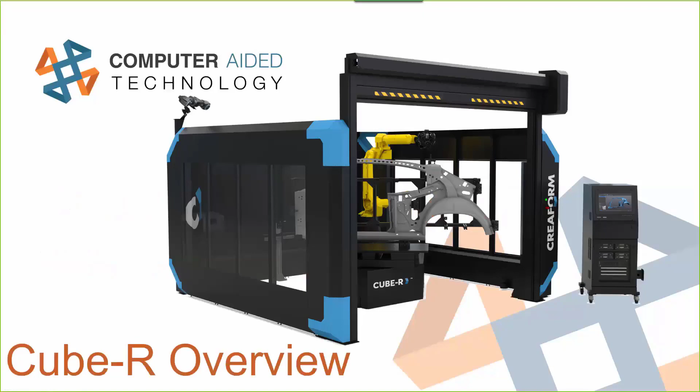Just an overview of the Cube R. The recommended part size, we can do parts up to 3 meters in length - length, width, height - 3 meters, as long as the part fits within that bounding box, the Cube R can safely process that. We have an accuracy of 30 microns or 1.2 thousandths of an inch, and a mesh resolution of 50 microns or 2 thousandths of an inch.

We'll go into a little bit more detail on the differences between accuracy and resolution and what that actually means in terms of real-world application.

The Cube R also has fully integrated safety systems to make sure that the system can't be run in a way that will cause any sort of employee injury while in operation. It also has an automatic calibration, which is really nice to prevent accuracy drift over time, so you can just program that into the robot's running program, and it'll self-calibrate.

The whole system is run off of a Creaform MetraScan system combined with a FANUC M20iA robotic arm and a high-capacity 360-degree turntable.

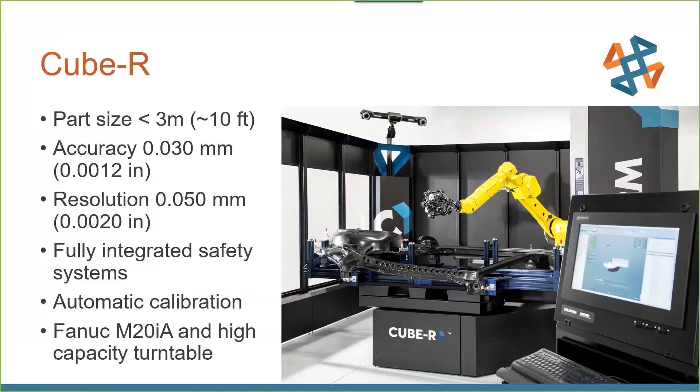Expanding on that robotic arm, it's a 6-axis arm combined with a 360-degree turntable for 7 total axes of motion control. The arm itself has 0.08 millimeters of repeatability, a max reach of about 1.8 meters, kind of ties into our max part size of 3 meters, and a 1,000 kilogram or 2,200 pound capacity automatic turntable.

If we do have parts that large, a really nice feature of the turntable is that it is forklift compatible. You can see the forklift fork slots here on this side, and you also have another set on the longer side as well. It's very nice to have that forklift capability when we're dealing with thousands and thousands of pounds of parts.

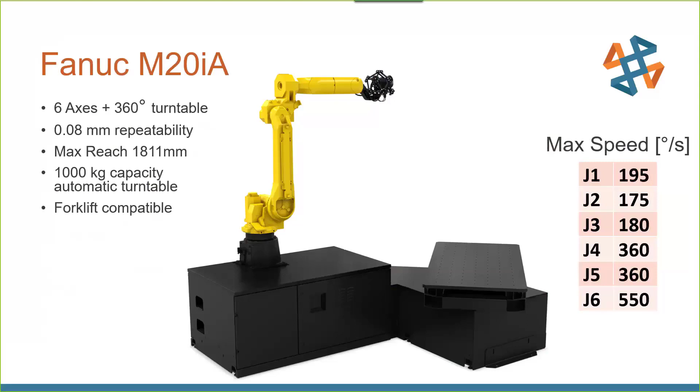What you see on that table on the right there is just, if you're curious, the different max speeds in degrees per second of the joint. So J1 is joint 1, and that is the base of the robotic arm attached to the control cabinet, with joint 6 being the wrist attached to the scanner.

So how does scanning actually work? It's a 2-part system. Like I mentioned, it's a robotic-mounted Creaform MetraScan. The MetraScan operates with 2 main pieces of equipment here.

We have the actual scanner, the laser scanner that's attached to the end of the robotic arm that you can see in the foreground here. It almost kind of looks like a disco ball. Then in the background, in the top corner of the scanning cell, we have the CTrack device - this is the dual cameras that you see at the top left of the screen.

That camera system is going to be watching the cell and using different information gathered from these positioning targets. A little blurry in this photo, but you can see they are the white dots with the black rim that are both on the scanner itself, which is on the end of the robotic arm, as well as in the bottom right of your screen - you can see that those targets are actually attached to our turntable as well.

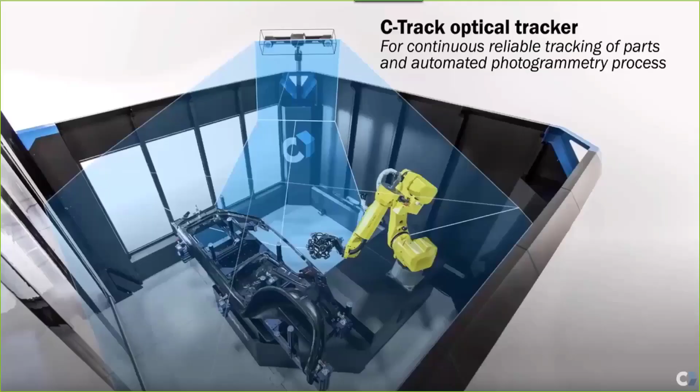And what this allows us to do is the CTrack is tracking these targets both on the part as well as on the robotic arm. It uses that information to create a reference frame.

When we're doing these 3D scans, we always need 2 pieces of information. The first piece, we need a reference frame - we need some way to find our way back home. We need to leave a trail of breadcrumbs, so to speak, so that we can chain all of our pieces of data together in an accurate and efficient manner. If we didn't have a reference frame, we would just kind of be creating floating data in the middle of nowhere with no inspection application, so to speak. So the CTrack is really the key to the solution there in creating the reference frame.

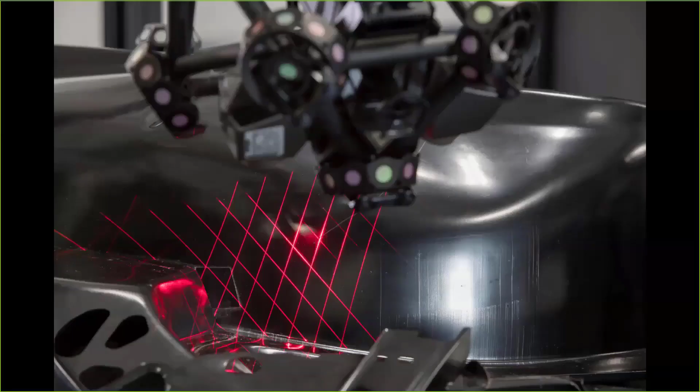Once we have that reference frame established, now the laser scanner comes into play. So the ball with the positioning targets on it, that's the laser scanner, and it will begin to project this crisscross laser array on the part surface. There's a camera system in the laser scanner itself that watches those lasers and observes how they deform across the part surface, which allows it to pick up the 3D surface deviation we're looking for in our measurements. So the scanner picks up the 3D surface information, and the CTrack then uses the reference targets to place that surface data into our global orientation, so we can measure from the far end of the part to the far end of the part accurately.

Getting specific on the actual MetraScan unit, you can see a nice rendered image there. So like I said before, accuracy down to 1.2 thousandths of an inch, resolution at 2 thousandths of an inch.

So what do these actually mean in terms of real-world application? Accuracy is your point-to-surface accuracy. So if you have a cube where the top surface is exactly 5 inches off of your tabletop, and you scan that surface, those points are going to be generated within an acceptable error cloud, in this case 1.2 thousandths of an inch above and below 5 inches, if that makes sense. So accuracy is the point-to-surface accuracy that the scanner can provide.

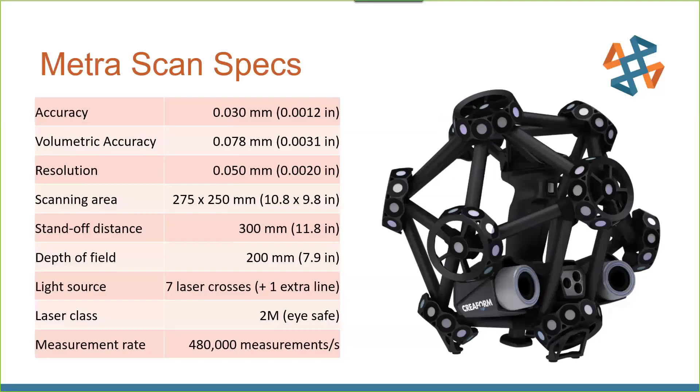Additionally, the system can pick up 480,000 measurements per second. That's really great for inspection applications like this, where normally you'd be probing the surface with a CMM, and the more points you probe, the longer it takes and bogs down the whole inspection process. Here, we're grabbing so many points per second that we're going to get plenty of data needed to make very complex surface deviation inspections easily and quickly.

Those positioning targets are placed on a very stable scale bar. This scale bar is a known value in terms of length and geometry of the ends of those targets that's hard-coded into the system. So every 5 cycles, 10 cycles, 100 cycles, you can program the scanner to come over and scan that scale bar, and it will compare the results it's getting versus the true nominal results hard-coded into the system, and adjust different parameters as necessary to bring itself back into calibration if it has drifted out. With that scale bar mounted inside the cell, you can just set it to auto-calibrate every X number of cycles and make sure you don't have accuracy drift over time. That's a very nice process improvement there.

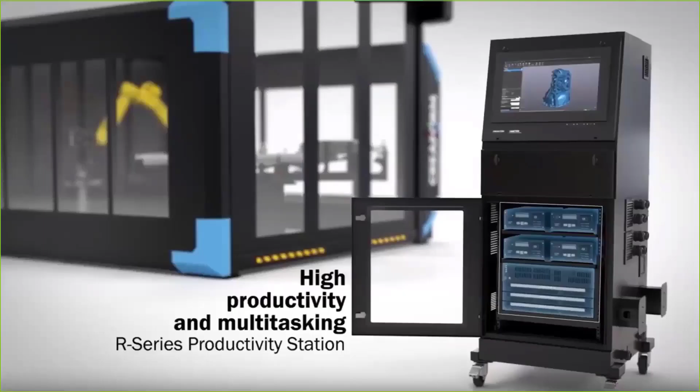So how's this whole setup controlled? The robotic arm is programmed with a combination of this R-Series productivity station you see on screen now, as well as a traditional robotic teach pendant. That's how we tell the robot what paths to take and the general overall geometry of our part setup. Additionally, as you can imagine, if we're grabbing 480,000 points per second, there's a lot of data to be crunching around in the background in order to inspect and process these parts.

If you notice on your screen in that cabinet door that's open, we have 2 identical processing units, one on top of the other. This goes into a function of the cell called parallel processing. While the robotic arm is scanning your first part, that first processing unit will start processing that mesh and begin inspection on it. We can then switch over to the second processing unit and begin scanning and inspecting the next part. So you're never waiting on the computation time of those processing units. You'll hot swap them in and out based on what you need automatically, and keep the uptime of the arm as maximized as possible. That parallel processing, for high productivity in shop floor environments where we're really looking to crank through as many parts as possible, really helps with system uptime.

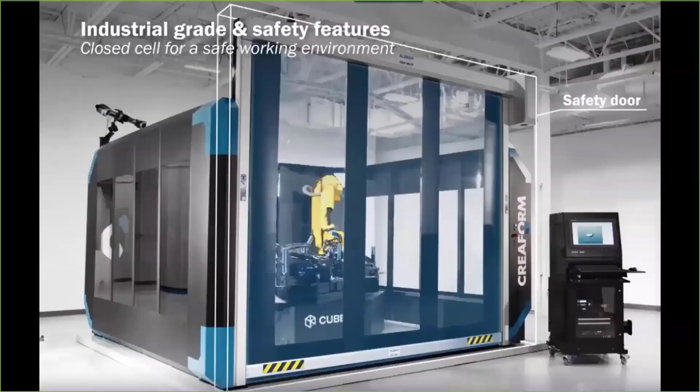Let's move on to safety features of the cell. First, we see a nice isometric view of the cell here. We have a rolling garage door. This door, with a push of a button, will roll up or roll down. It's also controlled by light curtains. If that light curtain barrier is ever broken while the door is in motion, the door will stop cold in its tracks very quickly to make sure nobody gets hit by the door moving down, in case a coworker hit the close button accidentally or for whatever reason. It's a light curtain controlled garage door.

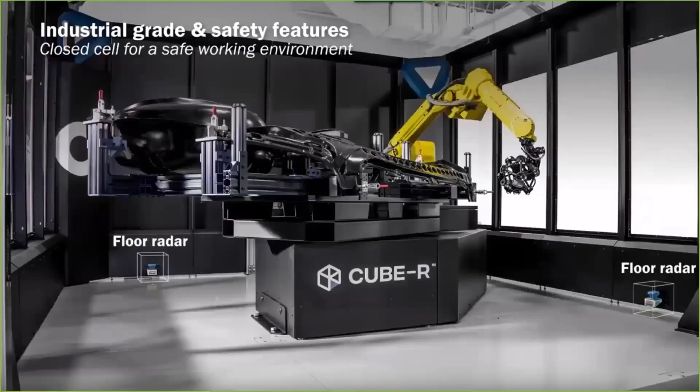If somehow someone is inside the cell setting up while somebody tries to close the garage door or start the inspection program, there are several floor radars around the perimeter of the cell that will prevent that from happening. If that floor radar is broken by an employee standing in the cell, or maybe some parts that aren't supposed to be in the cell are there and could potentially cause a crash with the robotic arm or the turntable, that floor radar safety net is going to prevent that from happening. So we have door safety and floor radar safety on this system.

So we did a general overview. Let's take a look at a specific example here so you guys can get an idea of cycle times and setup times for parts of this kind of complexity.

We have a transmission case here, and we're inspecting it. We can expect something of this complexity to take around an hour to an hour and a half to program, involving all the different motion of the robotic arm, motion of the turntable, different inspection points, and different tolerances of the inspection points on this particular part.

5 to 10 minutes for fixturing setup. I use the term fixturing loosely here. It's not really hard and fast fixturing like you're used to. It's more of a loose, flexible fixturing.

You can see we really only have 3 clamps here. We're just trying to hold the part loosely in the same volume from part to part. Obviously we don't want to be anything like 6 inches off in our setup, but if we're within a plus or minus an inch or so, as long as we aren't going to hit the robotic head as it goes through its scanning procedure, the mesh will self-align to the CAD model once we're done processing it. Being a little bit off part to part is nothing the system can't filter out very easily. So a very quick and easy fixturing setup is nice.

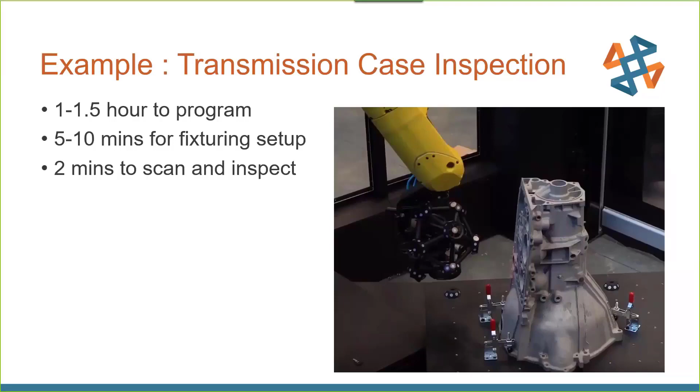Once we have our program and our fixturing set up, all we have to do is pop the part in, clamp it down, and set off the program, which takes about 2 minutes for this particular part. So setup is actually the majority of the time here, and once you get that set up, every part after that will be relatively quick.

So you can see with this kind of setup, we get about 660 parts per day. It's a very quick inspection process.

Versus a CMM, I call a CMM kind of like a serial process. You have to do one point after the other, after the other, after the other, all in a row. Whereas a system like this is a more parallel inspection process.

Once we have that mesh of the part - it took us 2 minutes to scan the mesh for this - we can inspect pretty much anything on the surface of the part almost instantly. It takes a little bit of processing time in the background, but nothing that's going to take more than the actual scan of the part itself.

So whether you have 10 inspection points, 100 inspection points, or 1,000 inspection points, your inspection time is going to be very consistent, and it's not going to grow linearly with number of inspection points like you would see with a CMM probing system.

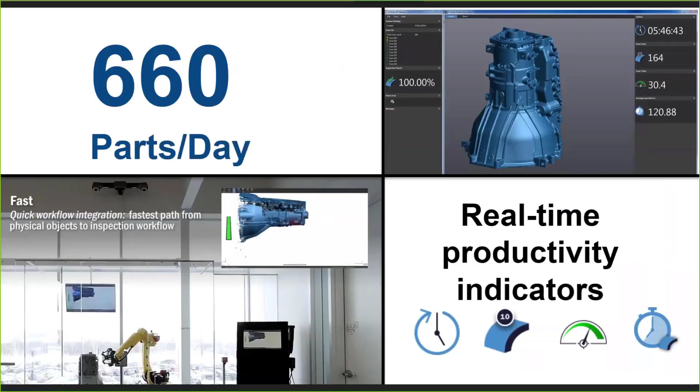The system also has a bunch of real-time productivity indicators, as we can see here. You've got your running uptime on the system, your scan count, and your average scans per hour or average scan time - kind of the same thing, but good to see broken out in 2 different ways. As we can see here, about 2 minutes, 121 seconds per scan we've averaged.

So that's going to be the conclusion of our Cube R overview.

Yeah, I don't see any questions come through. Let's see - oh, one just popped up: Does this provide a file I can export to, for example, SolidWorks?

Yes. So what the scanner is actually generating, what you're seeing on the top right of our screen right now, is what's called a mesh file or an STL file. It's built up of a bunch of very small triangles on the surface of the part. This particular workflow we've covered today is for inspection purposes, so we take that mesh and compare it to an already existing CAD file. We use that CAD file as our nominal.

The manufacturer Creaform has another type of software for exactly that application, for reverse engineering applications where we have a part that for whatever reason we don't have a CAD file. Maybe it's a very old part, maybe the data was lost, but we have the part physically sitting in front of us and we want to make a nice CAD file of it, a nice parametric SolidWorks file.

That software is called VX Model, and yes, that's exactly what it's made for. It's made for taking this organic mesh that doesn't really play that nicely with SolidWorks and turning it into, with a little bit of work from the designer, a parametric CAD file.